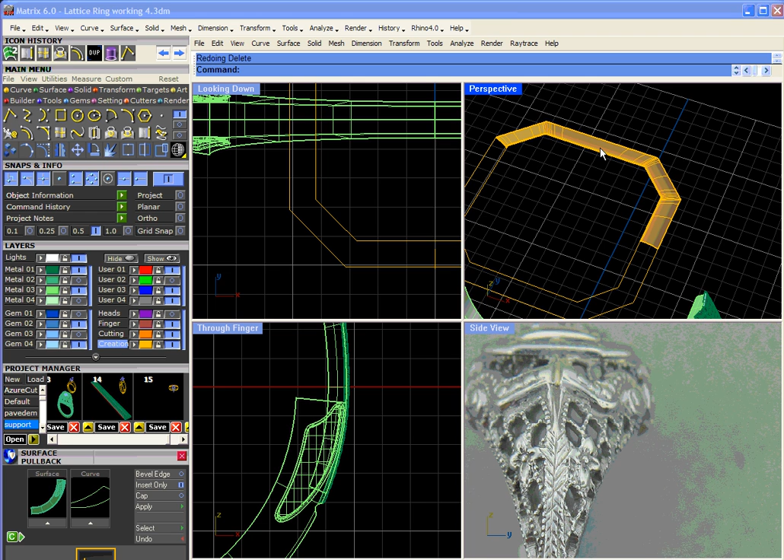Let's check our seam points. I really want this to be half, some way or another, halfway around. Oh, actually, let's hit on... oh no, I got that piece, so I did not hit halfway. I suppose it could be a quarter. Let's shoot for a quarter. Here's a quarter of it, from here around to here. And looking at this...

Looks like we want our design to start right on the half and go around. So let's go ahead and take this and split it with an ISO curve. Let's hit T for toggle, and there's mid, enter. So there's what we're working with.

That'll be just fine. On this we want to go to surface and shrink trimmed right there. Surface is already shrunk, alright, so we're good to go there. So we click on this thing and go to curve, and go to create UV curve,

And let's move it out here. And what do we got? We got... looks like a domey thing and another domey thing with a domey thing in between it. So lots of domey things.

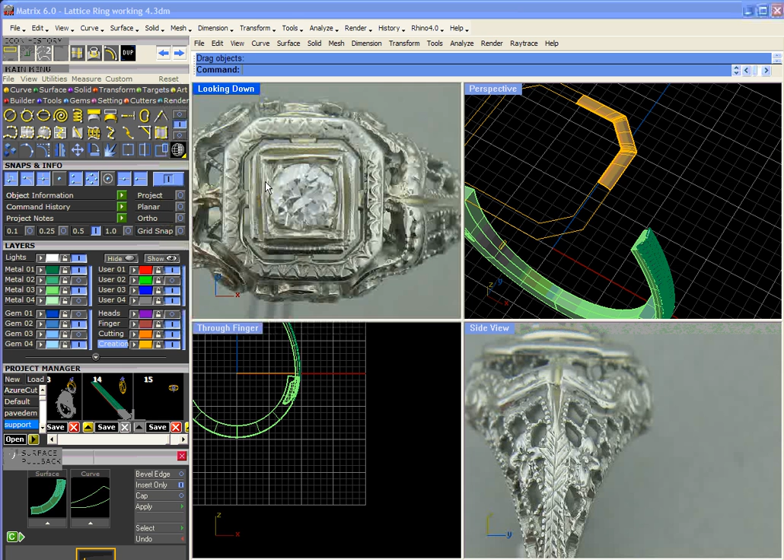Actually, that would also be a really good matrix art project as far as that goes, because it'll raise those up as little domey things as well. So either way, let's go ahead and see which way this is laid out.

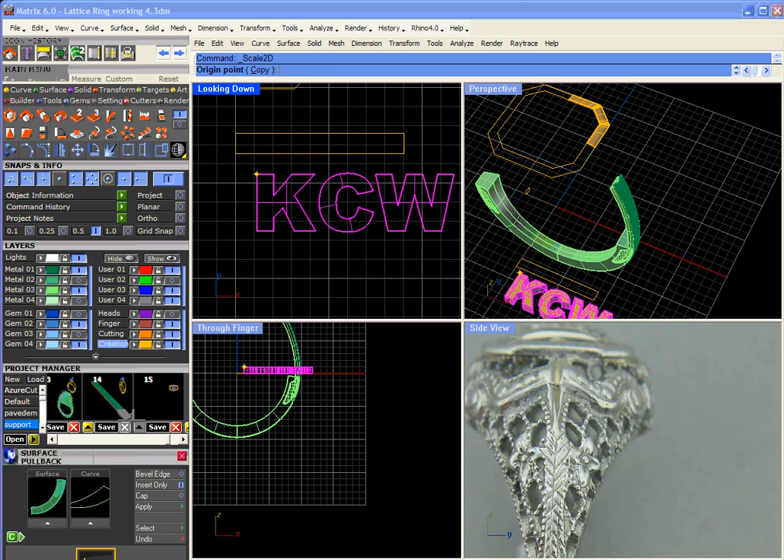So there's my KCW here, and we'll bring that over here. And we need to 2D scale this so that it fits in the box. Which now it does.

This explodes surface sweep 2. Alright, hopefully... oh, I don't know which way that went. Alright, oops, sweep 2. Alright, and you flow along. Let's see, there's a corner.

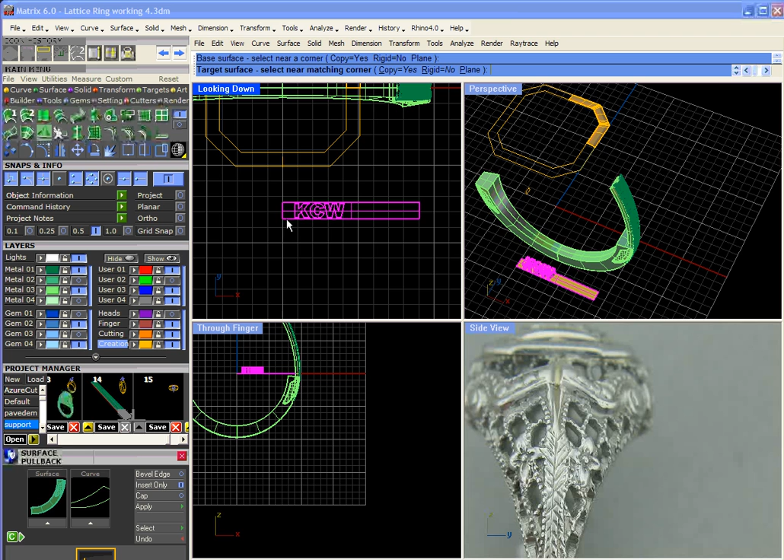There's a corner, alright, so just what we need there. So the top of the K goes inside. So this is the inside. Alright.

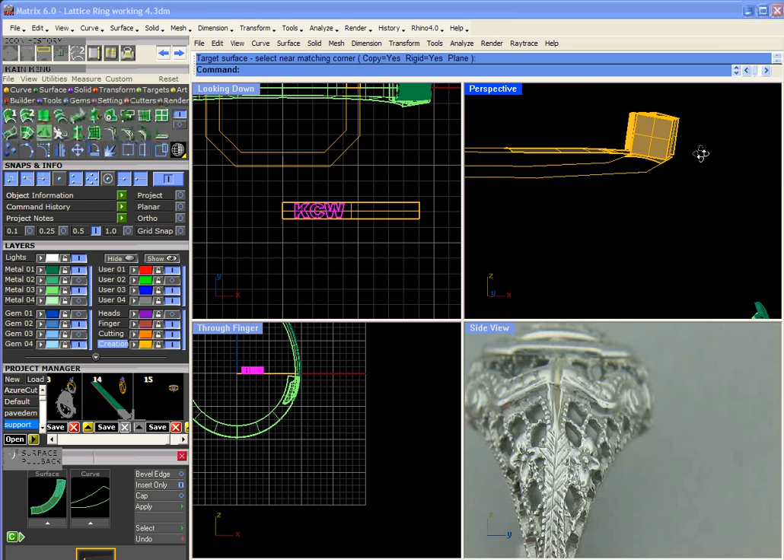Let's do flow along, and do rigid equals yes. Yeah, see, so there's what you get there, although it doesn't map to that. So anyway, it would be neat to have an X and a Y rigid so that it mapped this way but didn't change this way. That would be pretty cool.

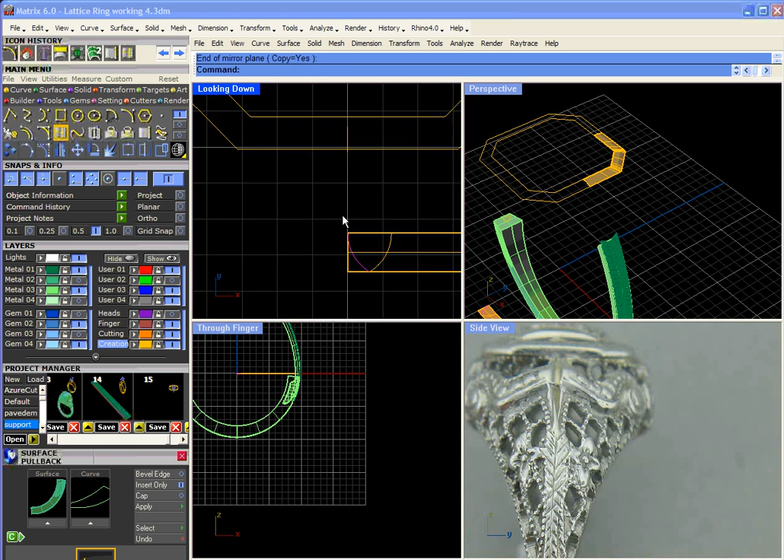Rhino wish list there. Okay, so anyway, there's that, and let's go ahead and mirror that, toward the center. Yep, alright.

We'll do fillet 0.1, there we go. And we'll offset this, and fillet that, fillet that, and we'll 1D scale that.

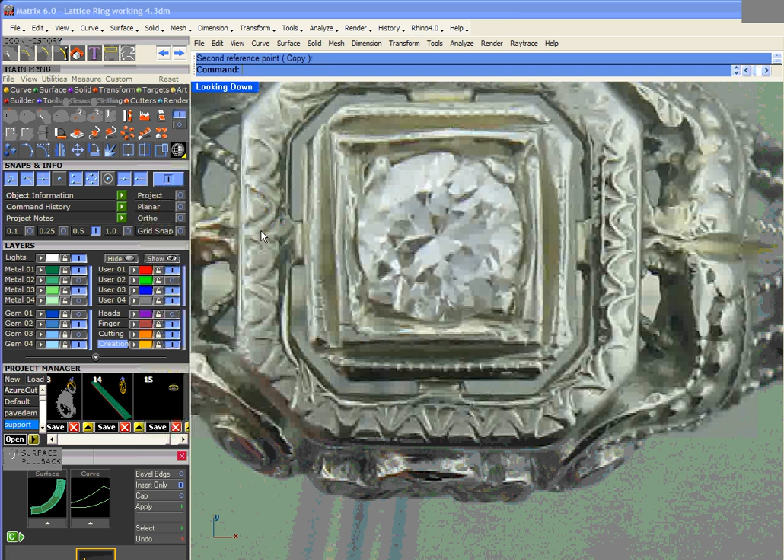Okay, so there's that. Then I need a piece in here, and then yet another piece that's solid inside it. So it looks like I need this to be a little thinner. And then we offset that again.

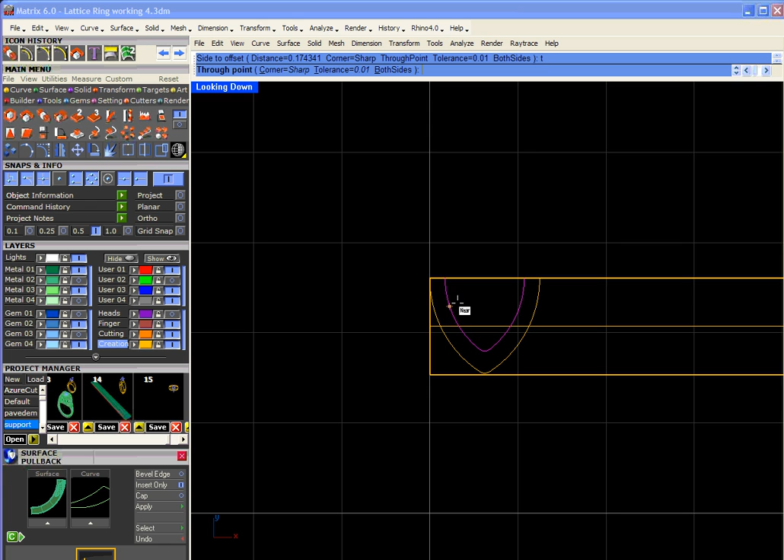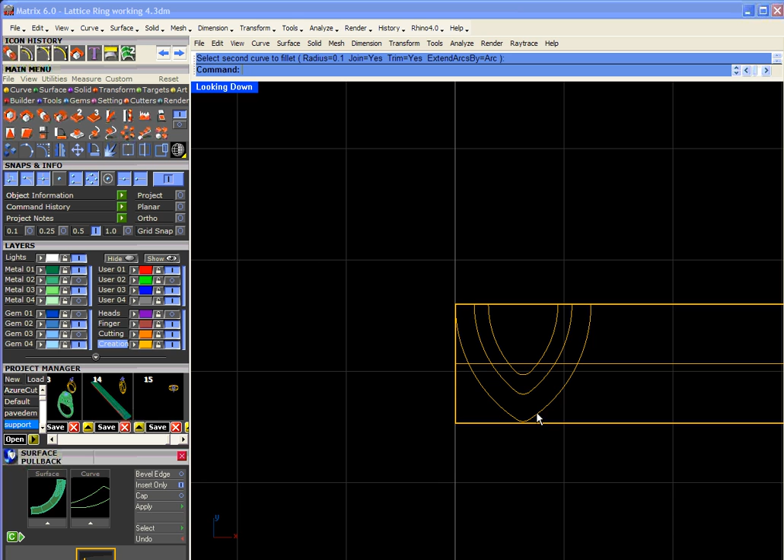And then we fillet. Okay. This one we want to bring these in down. There we go, kind of like that better.

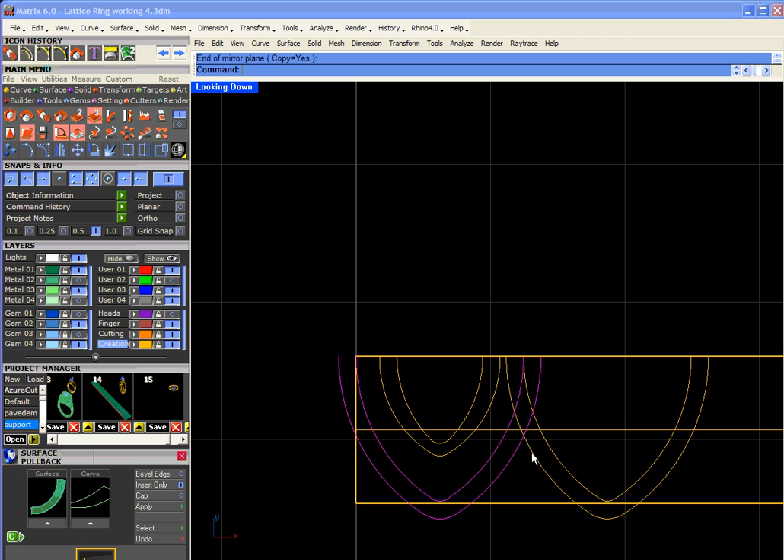And then we'll offset this way, and we'll pick these two, mirror it to the other side from here. And these two outside ones are the shape we're looking for, so we'll go trim like so. And then we have a curve here.

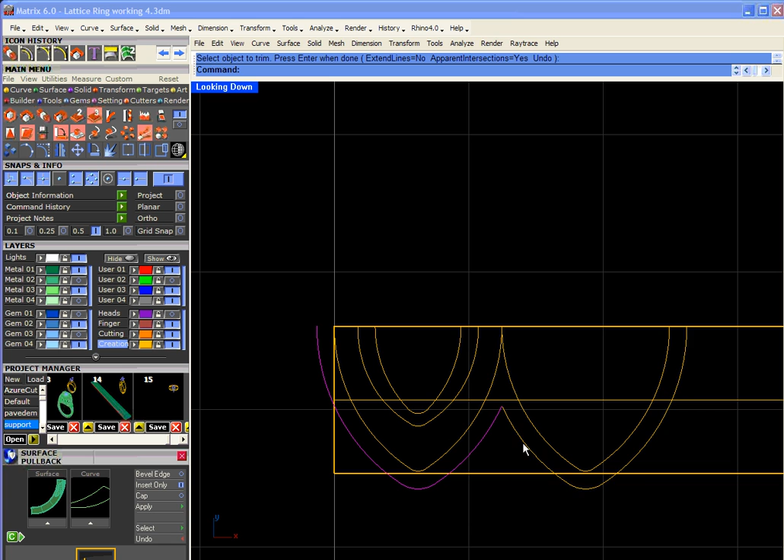Let's go ahead and offset this curve a little bit, and here's why. Trim. Okay, and actually let's go way up. Trim, there we go. And that's extra, I guess.

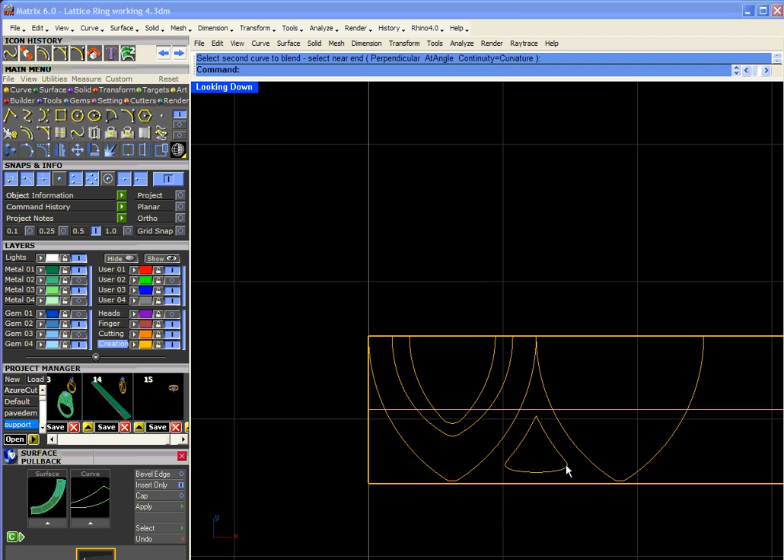Blend, blend, blend, blend, blend. There we go. Scale 2D. All right, so there's where all that came from. And...

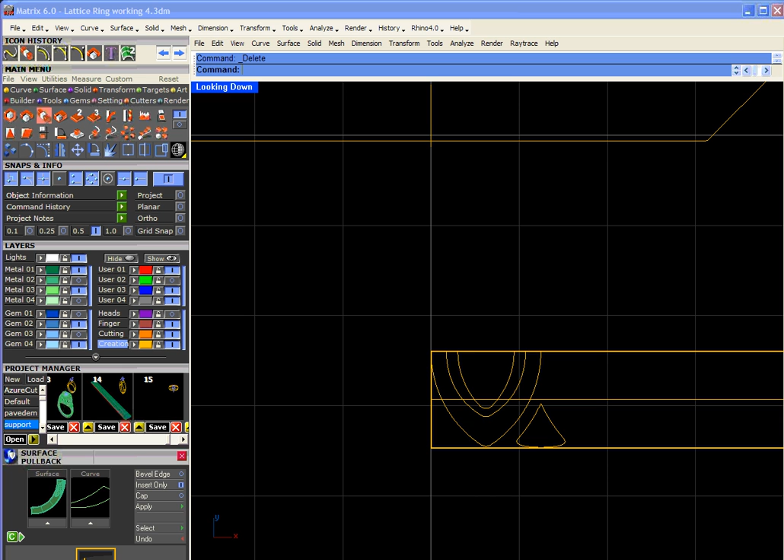Let's go ahead and do a straight line from here up, just a little bit like that. And then we're going to go duplicate, and we're going to go point to copy from, there, there, there, there, there, there. Okay.

We blend from here to here. We blend from here to here. We blend from here to here. We blend...